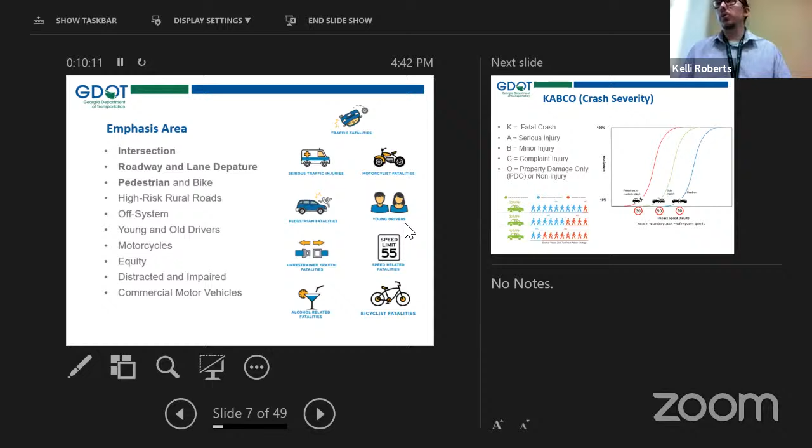So what is a crash? What does it look like? What do we even talk about? So it comes down to KABCO. Some states use a fatal, injury, and then a non-injury. We in Georgia adopted the KABCO severity. So K means you're fatal, A means you're serious injury. So that means you're going to the hospital because something is seriously wrong.

B is a minor injury, so that could be a gash in the leg or something that the officer sees, but it's nothing intense enough to go to the hospital about. C is your complaint in your neck, nothing visible that you can see, and an O is your property damage only. And these crash severities are dependent on one really main parameter, which is speed.

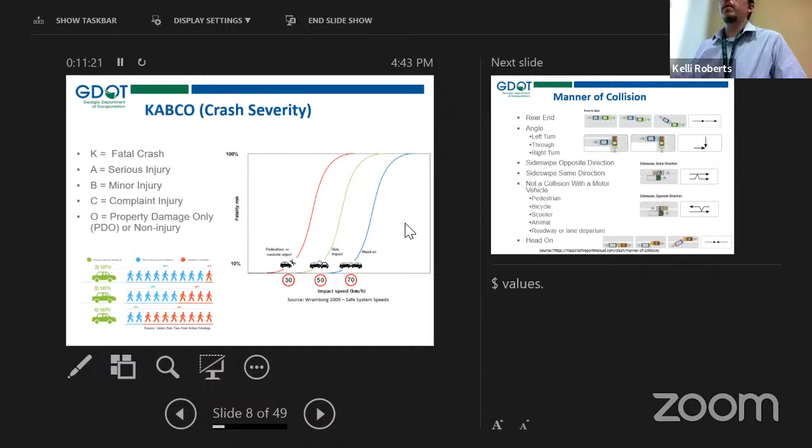As you can see down below, this came from Vision Zero, but it actually comes from an ITE document. The difference between the chances of you surviving a crash when you're a pedestrian hit by a vehicle: at 20 miles per hour, there's a 10% chance that you will die in that crash. But when you increase that by 20 miles per hour, that chance increases up to 80%. So speed is definitely a big factor, which I'll get into quickly here.

Manner of collision. So what type of crashes do you look at? Rear end, angles, or you can have your left through, your right turn angle, sideswipe opposite direction, sideswipe same direction. Not a collision with a vehicle has a whole bunch of stuff wrapped into it: you have your pedestrian, bicycle, scooter, animal, roadway departure. One of the most severe, that's your head on.

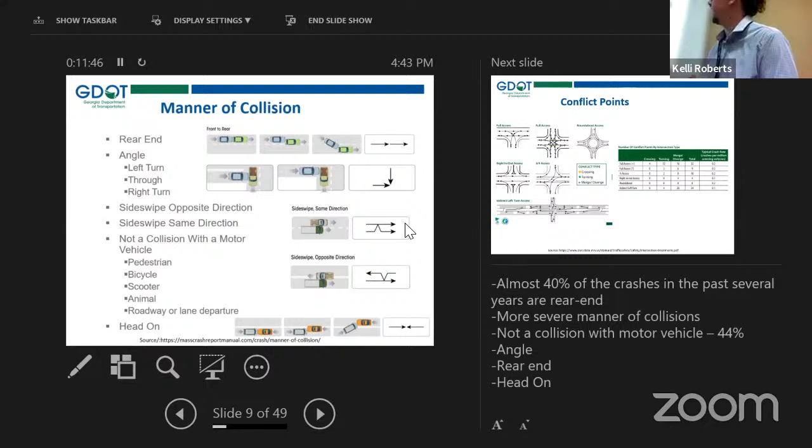Conflict points. So the name of the game for safety is reduce as many conflict points as you can, and you should be making the intersection or the roadway safer. This depicts the total conflict points for a full access facility. You have 32 conflict points. When you start looking, a roundabout reduces it down to 8. So 8 different ways that you can get into a crash with another vehicle or person or whatever the case may be. So 32 to 8 is a big jump. That's why roundabouts are being pushed so hard as a safety countermeasure.

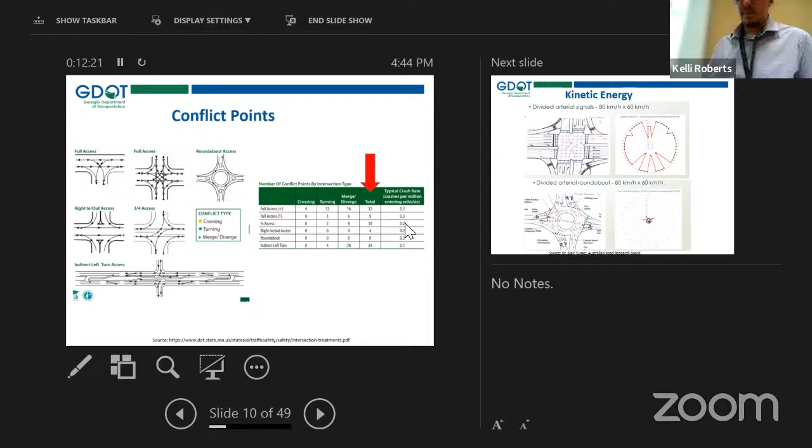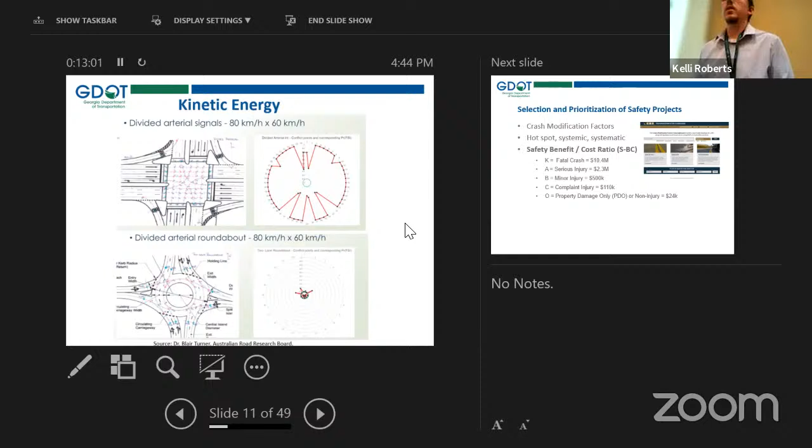And it boils down to, and I'm stressing that our research community here in Georgia start looking at these different things, this actually comes from Dr. Blair Turner from Australia. The kinetic energy in a crash goes back to the speeds associated and the manner of collision. At the top, you can see that's a signalized 4-leg intersection. The more dissipation you see in that graph, the higher amount of energy that comes into the crash, so higher severity. Down below is a roundabout, so you have control of speed on those approaches, and you can see the kinetic energy is more centralized, so a lot less of an impact.

So how do we select projects? Well, Kelli's going to go into a lot more detail on that, but at a high level, use crash modification factors. There's a database that the federal government has. You check out the database in terms of what solution you're trying to come up with, and it will give you a crash modification or a crash reduction number, and use that to figure out how many correctable crashes you can actually reduce.

We're almost there. We've gone to either side of the spectrum here, so this is actually pretty good. Yeah, that's good. That's good. That's good.

But yeah, so crash modification factors, these are proven through research of being able to correct a certain subset. Be careful though, because you really need to read into the details. You can get tripped up because you could look at realigning a road, but that study may be only for a rural approach with a certain amount of vehicles actually going through it. So make sure you pay attention to those type of things.

Hotspot, systemic, and systematic. So these are really big buzzwords too in the safety world. The main difference between them: hotspot is you found a location that has a lot of crashes. It's a little bit more passive in your approach, but people say you're kind of chasing your tail in that sense, or you're chasing fatalities in a sense. You're finding locations because there's a bunch of crashes there, and then you're going to try to correct that. So there's not too much predictive measures going into it.

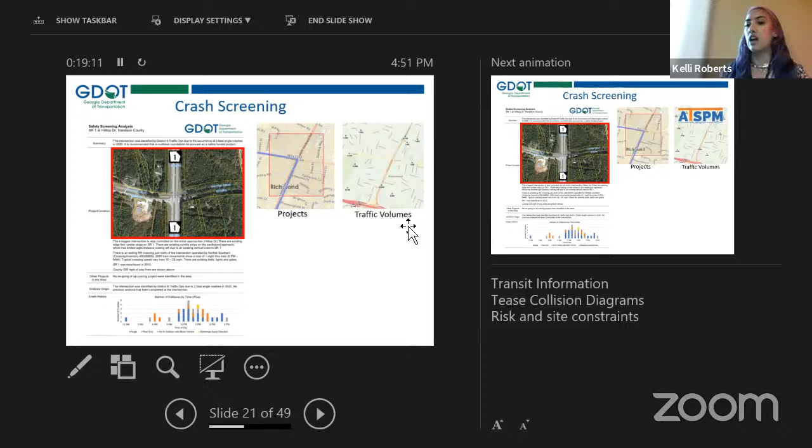So here's an example of one that was completed. As you can see, you have a nice photo of the intersection and a blurb with some information. So the biggest things is we look for other projects in the area. We also try to look for as many traffic volumes using all the available resources that we have. And then we also come up with a crash diagram. So the way this is set up, the sections are such that you get as much information from all of the available resources from this kind of preliminary data source.

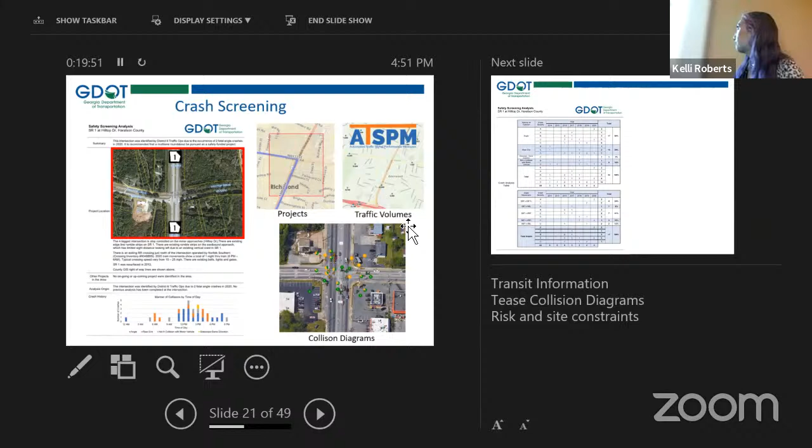So we understand that none of this is truly accurate. As you can see from the first photo, we have just GIS right-of-way lines. But I'm sure as everyone in the room understands, impacting right-of-way can significantly impact the project. So that's something we want to look at even in this preliminary phase, understanding that we'll need to further evaluate that down the road. So yeah, other projects and volumes are the things that we look at.

So another thing with safety, as we were talking about, was kinetic energy in crashes. So a lot of our projects do with traffic calming. So we also like to look at speed. So we take probe data, probe speed data. So again, we take this with a grain of salt. It's not accurate. It tends to underreport, but it's a good gauge. So we know if they're already over the posted speed, that means they're probably really speeding, and that's something we need to look at.

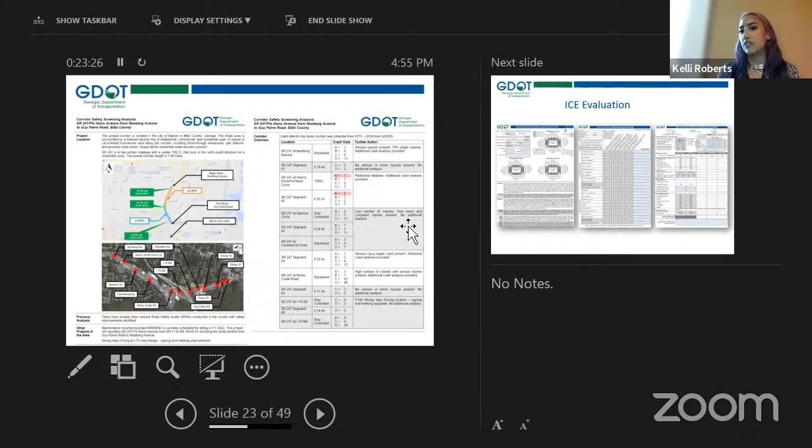So after we've done our screening, we say, yep, this looks like a good candidate for a potential safety funded project. Let's further evaluate that. So we'll go ahead and collect our official counts, and we'll do an ICE. I'm sure many of you are familiar with ICE. So for our stage one, a lot of what you'll see in the ICE has already been set up through our screening. We've already looked at the potential alternatives given the crash history.

So based on your crash screening, your alternative screening for your stage one should be pretty easy. And then similarly with your stage two, this is where you're incorporating all of that operational analysis with the counts you've collected, putting in some more refined cost and all of that good stuff.

All right, so once we have confirmed the control that we want to implement with the ICE, we'll move on to a traffic engineering study. This goes through and heavily documents everything that we've written. It also gets signed by the district and our office, so it's an official signed document. And then it'll get incorporated into the concept report. That is following the traditional PDP process.

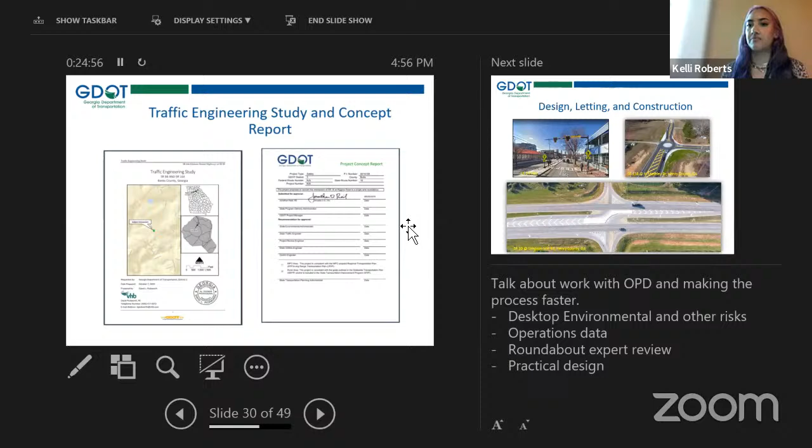But as Sam said earlier, we do try and look for ways to cut down on our process. So we do have some alternative delivery mechanisms. We'll implement things through quick response if possible, other things like that. And so then finally, we go on and actually get it designed, let, and go on to construction. So we'll definitely develop a concept layout and look at all of that.

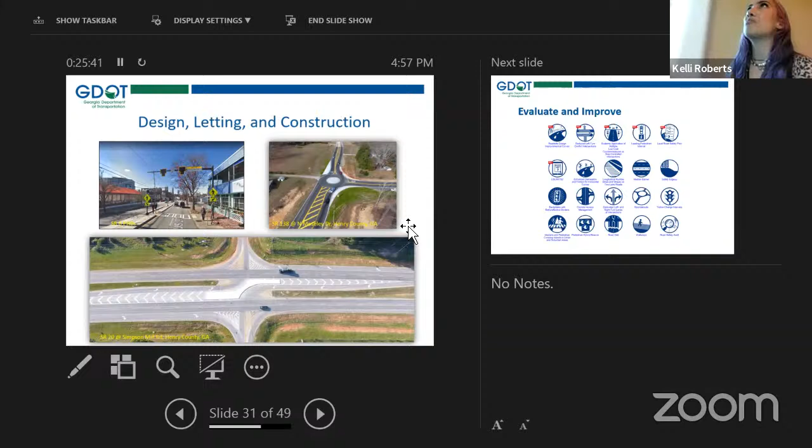And this is where your roundabout design guide that I'm sure many of you were interested in comes into play. In terms of design, it is an ever progressing process. Once things are out in the field, we like to evaluate them and see what design practices we can make better, what is working, what's not. So the process doesn't just stop once you've selected your alternative. We like to continue to evaluate and improve. And I'm sure you've seen some differences in our principles in our roundabout design guide.

So that's the traditional way you build a safety project. We also have some other things that we do within our safety program called a road safety audit. We have guidelines and templates; this is an FHWA guideline. We perform 14 road safety audits a year, 2 per district. These are corridors that are selected based on a data-driven process. So again, similar to Numetric, this is a sliding window analysis.

We'll select corridors up to about 1 mile in length, and, using our data-driven process, understand the crashes that are going on there. And then we'll go through a more in-depth way to actually develop a project.

So we'll assemble a multidisciplinary team comprised of people at GDOT, not just the TMC, but also the district maintenance office, MPOs, regional commissions. We'll look at the corridor. If there's a hospital or an elementary school, we'll get some of their representatives involved. We're trying to get the people who really use those roadways every day to give their safety input back.

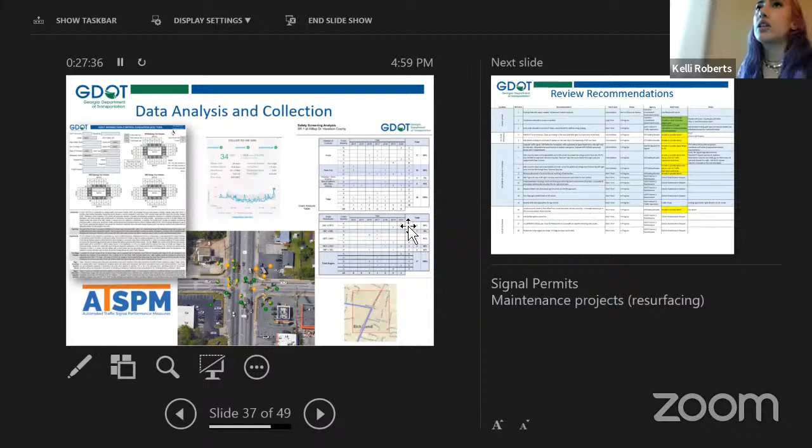All right, so similarly to our process, we're going to use data and everything. So before we actually go out and walk the corridor like we do in the road safety audit, we'll collect some background data, understand what's going on at every intersection, what are the turning movements, all the crashes, so that we're prepared when we go out in the field and can answer questions from our team.

So that's all compiled into recommendations, which are then distributed out to all stakeholders. So these are written in a way such that anyone who's never seen the document can just pick this up and understand what's going on, where exactly the location they're referring to, and what to do. So when it comes to installing a new advanced warning sign, we have not just install the advanced warning sign, but how many feet back from a reference point is that, at what intersection, and things like that. So we just want it to be as detailed as possible.

And then all of our data analysis, the field visit, our recommendations are compiled and distributed in a final report. And of course, it doesn't stop there, but we actually have to make sure that our recommendations are implemented. So we do have a tracking system to where we can look and make sure that we're staying on top of these RSA recommendations.

All right, so we have another twist on the RSAs, which is called Safe Routes to School. Sam mentioned that it is being expanded into high school, but it was previously looking at only elementary and middle school. So they look at how kids get to school. So one thing that I thought was really interesting that they do is called Take a Knee. So we all use the intersections every day, but what does it look like from a kid's perspective to take a knee? And it looks very different. So that's something that they look at, and how to walk and bike safely to school.

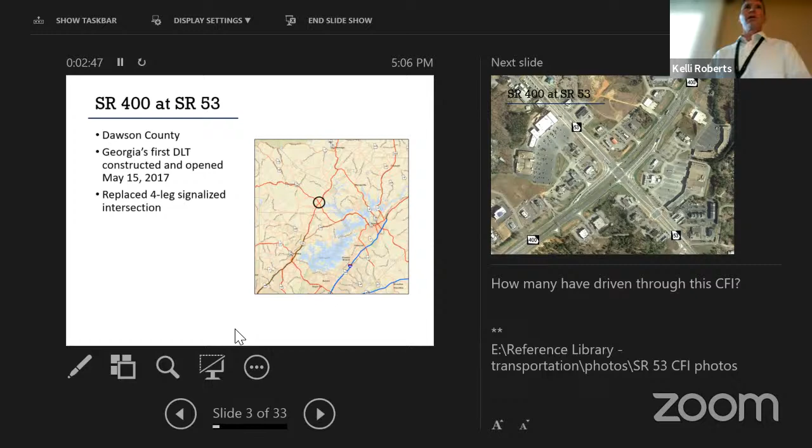So Georgia's first DLT intersection was constructed and opened in 2017 in Dawson County. This is at the intersection of State Route 400, which is a primarily limited access freeway, and State Route 53, and that replaced a 4-leg signalized intersection. Here's an aerial view of that location. State Route 400 is kind of in that north-south direction.

And the CFI DLT is provided for in the northbound direction and southbound direction, displacing those left turns. So they have that crossover intersection prior to the main intersection of State Route 53. And then on the State Route 53 approaches, you have right turn slip lanes that then allow you to turn onto 400. And so this is operating very well. It provides a lot of capacity at this location.

Primarily, I believe this was intended for a capacity improvement, not really addressing a safety concern. But one interesting thing, which I've come across in evaluating a lot of intersections, comparing with other alternative intersections, is the CFI can really move a lot of traffic when you orient them with that left turn, addressing a high left turn movement.

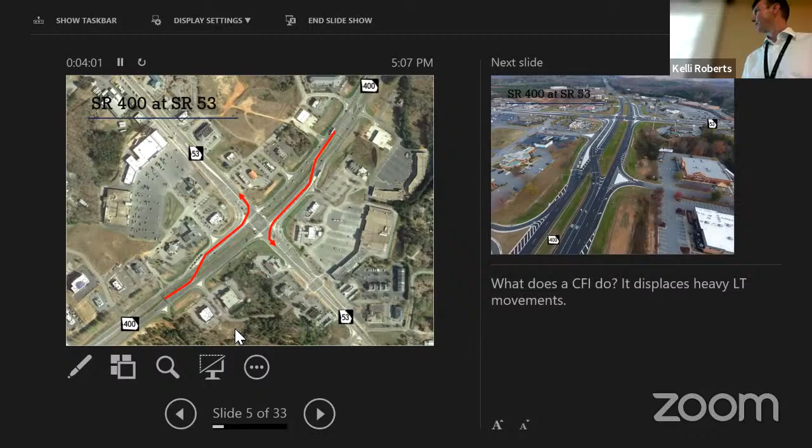Here's drone footage looking north along State Route 400. You can see the 2-lane crossover heading in the northbound direction. So raise a hand, who has driven through this CFI? Okay, great. Most of the crowd here. And so this was designed by Georgia DOT, first one installed, and this is taken, I guess, right near the end of construction.

So in terms of signal operation, there's one signal controller operating all of those intersections. There's a lot of signal overlaps to make that operate. And so Georgia DOT traffic operations spearheaded the timing at this location. And there are many phasing considerations and lengthy tweaking of timing to progress the traffic through those intersections.

During construction, they had to address the skewed right turn signals. So if you were turning off of 53, you come up to this very skewed angle, and the red signal heads were visible from the through lanes. So they added louvers to limit that visibility from the through traffic.

You'll notice here in this picture, and I'll touch on it in a minute, these right turns were designed as dual rights, which they did actually change to a single right. So it's striped as a single right lane, and right turns are allowed on red, which helps because the right turn volume is fairly low. So here's a picture of that, right near the end of construction, where they changed that 2-lane approach to a single lane.

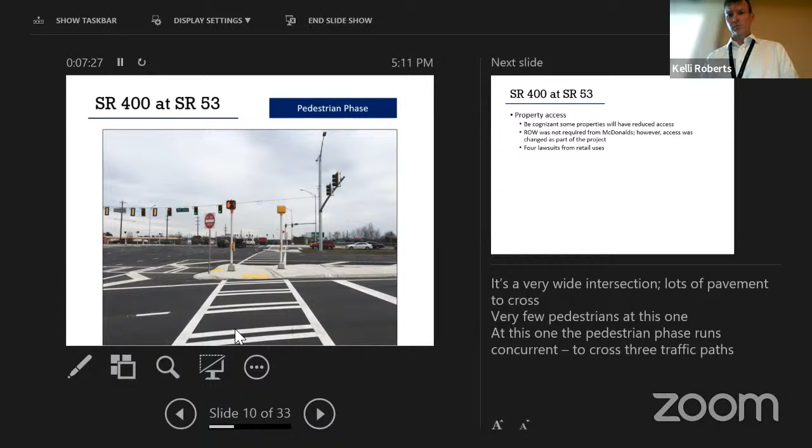Another consideration at the CFIs is to be cognizant that some properties will have reduced access. Right-of-way was not required for McDonald's, which is on one of the quadrants with the right turn lane. However, access was changed to that business. There were actually 4 lawsuits from retail users at this interchange, and I know that McDonald's was awarded damages because their access was changed. However, they weren't part of the right-of-way negotiation. So we need to be mindful of that. GDOT's now addressing that in future CFIs.

From our CEI staff, they oversaw the construction of this. And from day one, they said many drivers kept trying to turn left at the main intersection. So the contractor had to have one traffic control person staged at that main intersection, directing drivers not to turn left until they eventually learned, and the signage was all up to not turn at that location. They also said it was difficult to maintain and keep the fast food driveways open during construction. They did close driveways for a couple days, but as they were building that, switching traffic over, it was a little difficult.

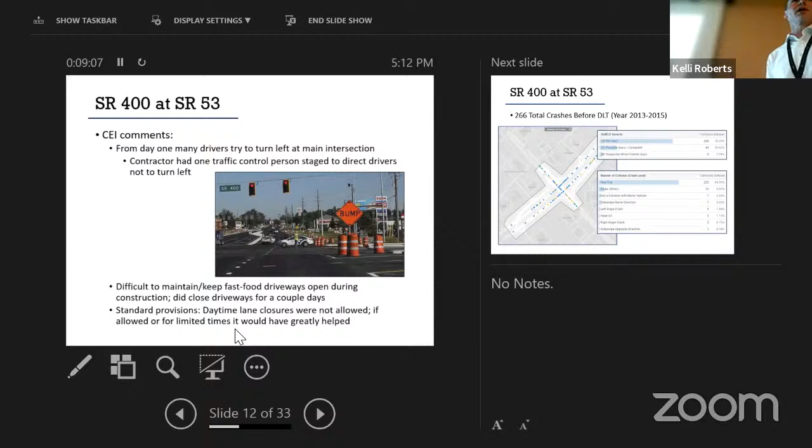Also, they had a standard provision under which daytime lane closures were not allowed. That made it a bit difficult to construct. They said even if they could have lane closures for just limited times during the day, that would have greatly helped in the construction.

So this DLT was constructed in 2017, and we've got some time here to do a comparison of the crashes. Doing an initial crash review for the 3 years, 2013 to 2015, prior to opening, we had 266 total crashes. And you can see here the severity. Primarily, we had property damage only, the O type. We had some possible injury and minor injury. And in terms of manner of collision, primarily we had rear end crashes. There were a total of 23 angle crashes at this location.

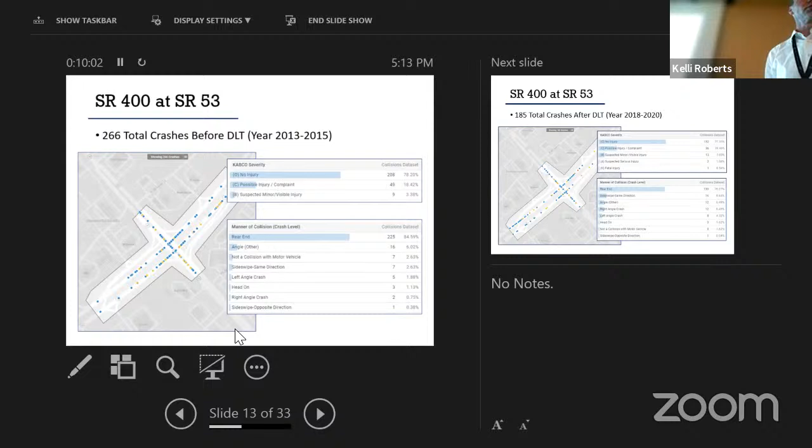So the power of Numetric is you can quickly pull for the 3 years after. From 2018 to 2020, we had a reduction in crashes. We had 185. And you can see the severity is primarily property damage only. We did have a couple serious and 1 fatality. In terms of manner of collision, they pretty much stayed consistent. Still had a lot of the rear ends, which is common at our traffic signals. We did have additional angle crashes.

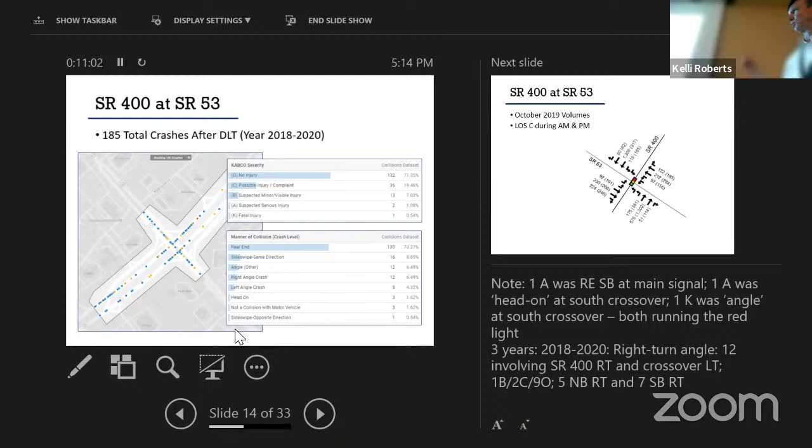So we had a total of 32 angle crashes, and we did look at the 1 fatality and the 2 serious injuries. One of the serious injuries and the fatality were at the crossover intersection, so it's somebody running the red light, unfortunately. And one of the serious injuries was a rear end on 400. But overall, we are seeing a reduction in the crashes.

In terms of volume, these were collected in 2019, pre-COVID, and this intersection is carrying a pretty high volume, but not as high as some of the future locations you'll see later in the presentation. This operates at level of service C during the peak hours. And you'll see our heaviest left turn movement is 361 in the northbound direction.

So moving on to our second DLT opened in Georgia, which was opened in the city of Snellville. This opened in 2019 and replaced a 4-leg intersection. How many have driven through this CFI? All right.

Here's drone footage at this location, pretty close to the end of construction. Not quite all the markings are out there; you still see a few barrels. This is looking eastbound on US 78, and State Route 124 is in the north and south direction. At this location, every one of these is a little bit different. You'll notice we have the displaced left heading in the eastbound direction, so you've got two left turn lanes turning onto 124 north.

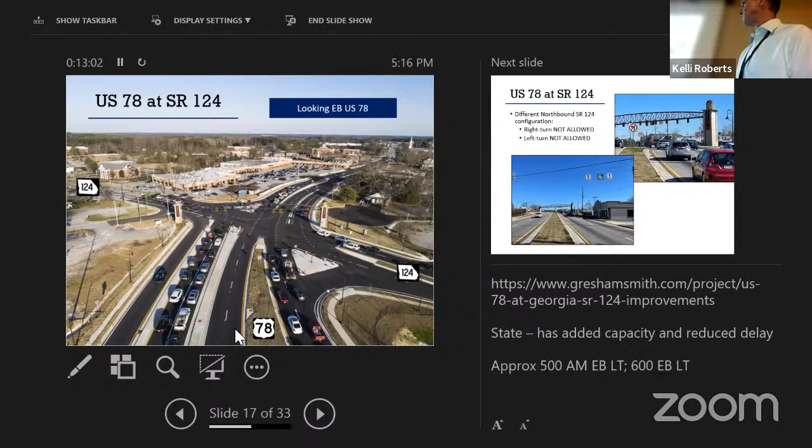And we'll talk about that in just a second, because the next slide shows how that right turn's not allowed and that left turn's not allowed on northbound State Route 124. So there is signage out there to prohibit those turns. The reason those movements were prohibited at this intersection is there's actually Henry Clower Boulevard, which provides the ability to get to eastbound or westbound US 78. So this is a previous signalized intersection with advanced signage to direct cars to their destination.

Now, with the removal of these turn movements, there has been some confusion for drivers, and currently Gwinnett County is looking at some options for additional signage to really get drivers' attention that you need to turn prior to and avoid. One of their concerns is really those drivers going north and trying to turn right at that location, because they could turn directly into those oncoming cars that are making that left turn.

And in terms of property access, during construction, GDOT did purchase a number of properties along that slip lane and provided limited access so that they don't have that. So they recognized that they were compensating property owners for that reduced access.

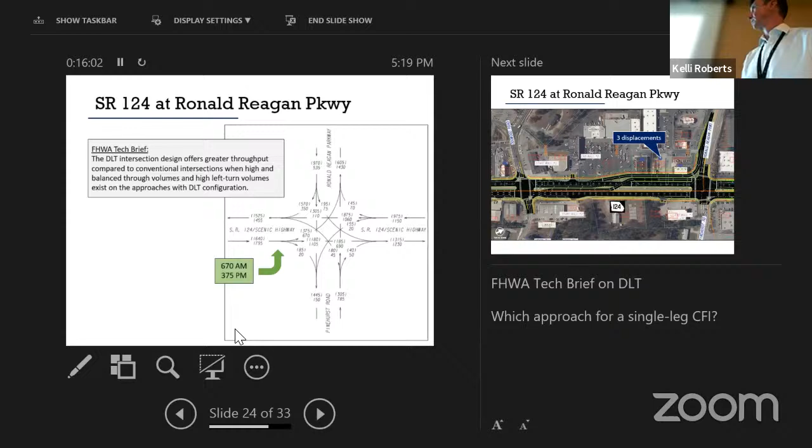So I put up the traffic diagram here. Not sure if you can see that from your seat, but there is one approach which has very high left turns: northbound State Route 124, there's your AM and PM volumes. And so what we developed at this location was a one-sided CFI. So instead of needing to provide 2 legs of a CFI, it's just addressing that one high volume left turn movement. We have a dual left crossover, and then they turn onto Ronald Reagan Parkway.

And then there's a very high right turn movement. So we have 2 rights that come from Ronald Reagan Parkway and then merge back onto 124. That does require 3 displacements. So we're making sure to eliminate access and driveways on that quadrant. And one other thing to note is if you're coming south on 124, we've kept a single left turn there to accommodate a lower volume at that location.

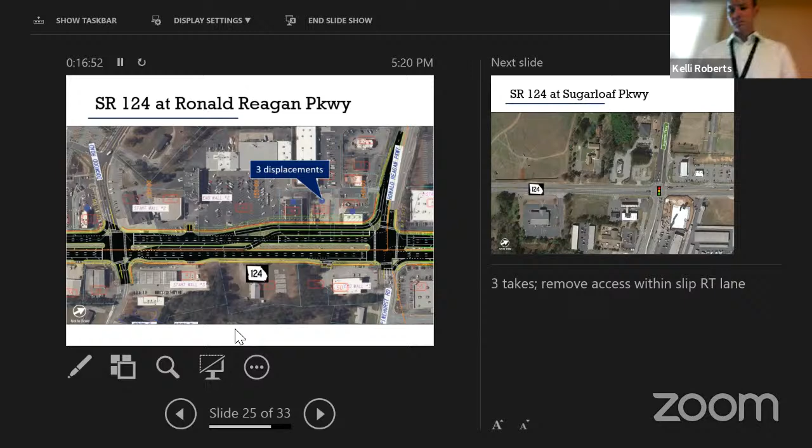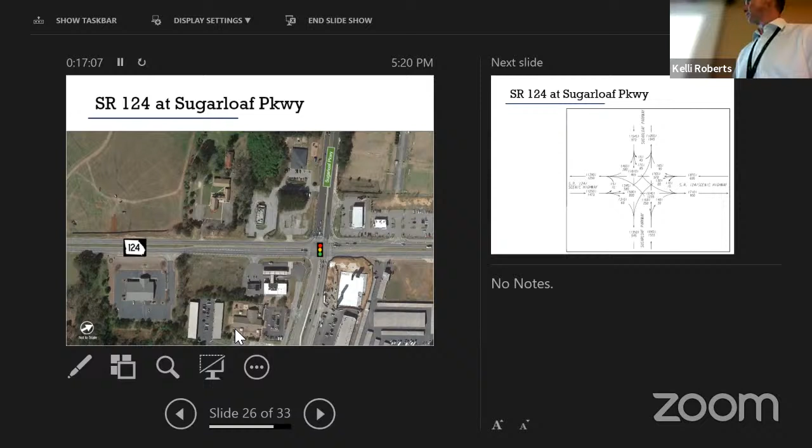The second location along this corridor is up at Sugarloaf Parkway. So this is another major east-west crossing of State Route 124. It's currently a 4-leg intersection. You see the dual left turns there heading north on State Route 124. So here's the traffic diagram, and I'll try to quiz you here. Which left turn movement, and I can read them out in a second, would you look to have a displaced left turn first?

We've got, on Sugarloaf, heading up on this diagram, 290 AM lefts and 160 in the PM. Heading north on State Route 124, we've got 345 in the AM and 580 in the PM. Heading east, or south on this diagram, on Sugarloaf Parkway, we've got 70 AM and 85 left turns. And then in the other direction, going south on 124, we've got 20 AM and 30 PM left turns. So which direction do you think we chose to look for a displaced left? Yeah. 124 going north.

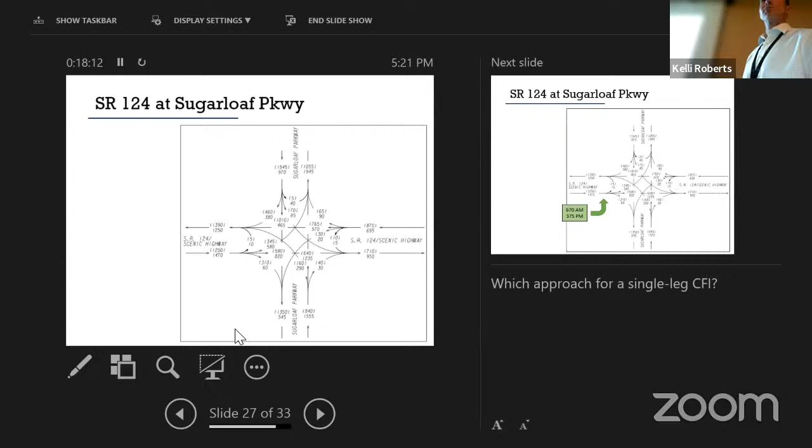All right. And then the second question is, with alternative intersections, you're really looking to pull those left turns out of the intersection, which gives you more capacity. So we came up with a second improvement. What is another approach where you could maybe displace a left turn? Shout out an idea. I heard a south suggestion.

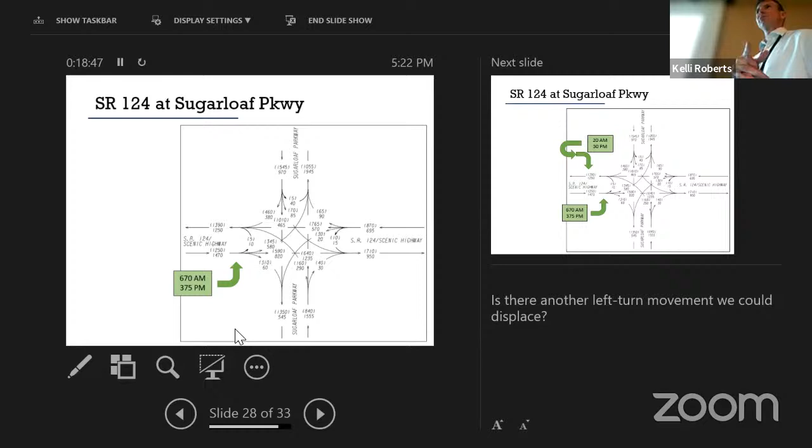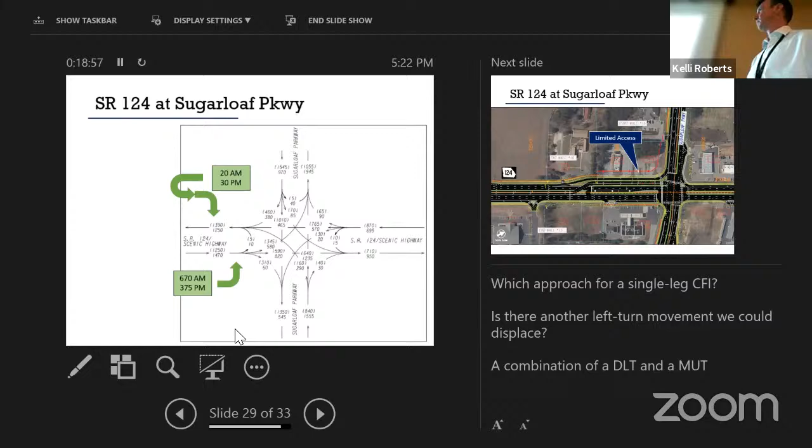All right, so what if we could move the 20 AM and the 30 PM to a different location and make them go past the intersection and U-turn and come back? So we combined a DLT with a median U-turn idea. So in the northbound 124 direction, you've got your two lefts. We're handling that heavy left turn movement onto Sugarloaf Parkway. And then by removing that southbound left turn signal phase at Sugarloaf, we're getting more green time to Sugarloaf and handling those 20 to 30 left turns in a U-turn situation.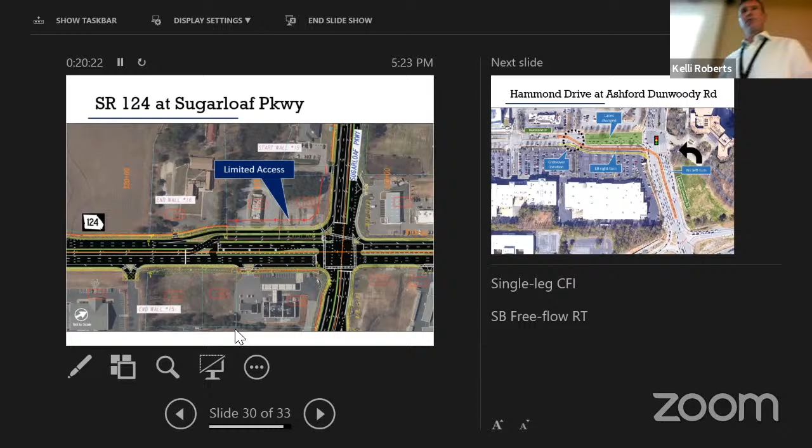We wanted to show one concept of when you're working through alternatives analysis. We were looking at the intersection of Hammond Drive and Ashford Dunwoody, which is, as many of you know, very busy, very congested. And so don't hesitate to flip the idea of a CFI. So instead of the crossover happening before the signal, you could actually have it after the signal. So if you wanted to make the left turns in that northbound direction, make the left first, travel down, and then do a crossover to get to that other approach. This works good if you're in a constrained situation, or maybe you have some kind of constraint or railroad you're trying to cross, to flip it.

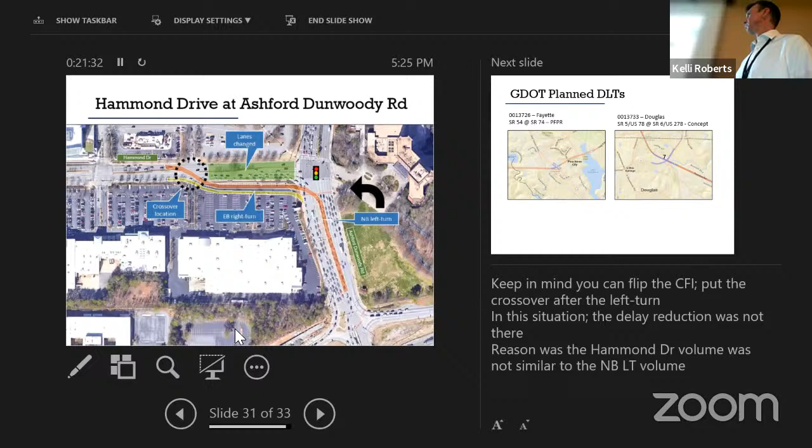Now, in this location, when we did the capacity analysis, we found that the delay reduction was not there. And really the reason was Hammond Drive and Ravinia, the volumes aren't similar to that northbound left turn movement. And so it wasn't found suitable at this location.

Last slide is sharing, this is from Chris Raymond, showing that there are some DLTs in progress. One is in Fayette at the intersection of State Route 54 and State Route 74. That's in PFPR. And then a second location is in Douglas County at State Route 5 and State Route 6. That's in concept. And I know with each of these, they're also looking at other alternatives before they select, to see if DLT is the preferred alternative. So that finishes my presentation. Thank you.